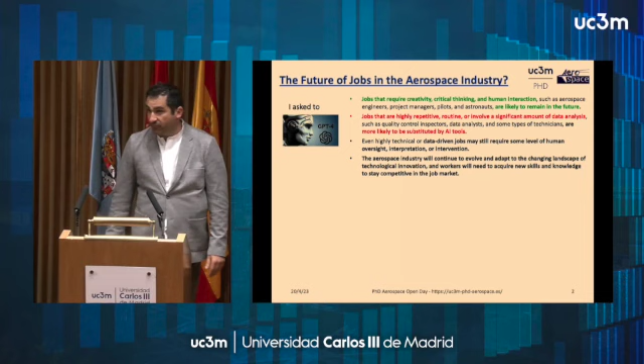I would say not all of them, but it seems like we're in the good direction. Of course, those jobs that are highly repetitive, routine, and involve significant amounts of data might be substituted by artificial intelligence or tools. The aerospace industry will continue to evolve and adapt to the changing landscape as we've done throughout the last century, but of course we need to change the way we are facing aerospace engineering.

I was not very convinced about the first answer, because we are aerospace engineers and we know that some of the jobs we are doing probably will be substituted by machines. So I kept asking: do you really think all aerospace engineers will remain in the future, just with a bachelor and a master? Or do you think we need additional background, additional training?

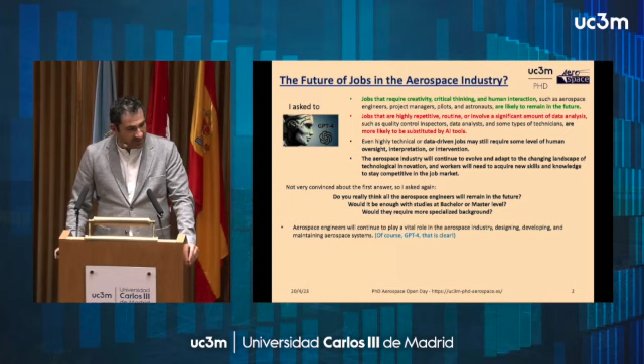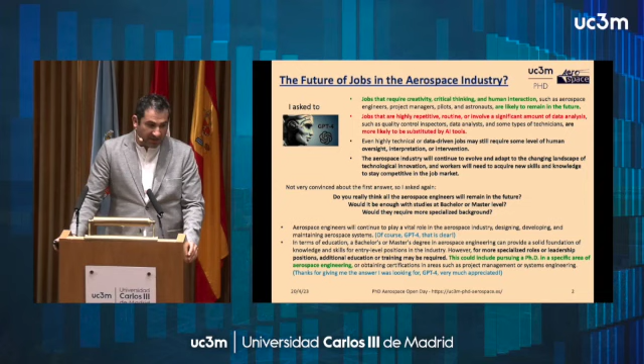And the chat provided me this answer: we will continue to play an important role. That's good news, that is clear. And in terms of education, it seems that pursuing a PhD might be a good direction to get creativity, critical thinking, and eventually have jobs in the future.

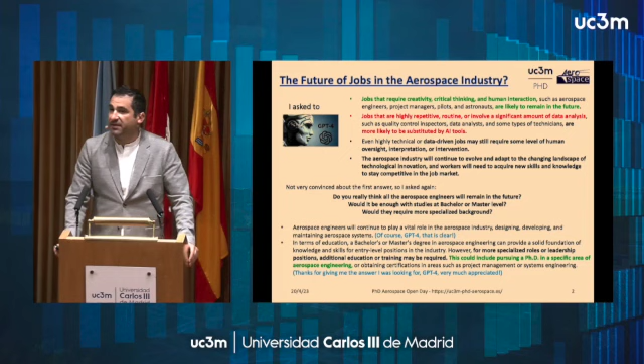So this is the answer I was looking for. It seems that pursuing a PhD might be a good option to complement bachelor and master studies in aerospace engineering and other fields.

Now, why pursue a PhD in aerospace engineering? I continued asking the chat, and it seems that it provides skills in problem solving, critical thinking, data analysis, advanced knowledge and skills, which is good.

It also seems that it provides innovation, or the capability to innovate, which is important, creativity. It offers the possibility to grow personally. So those three are intellectual assets, which we are all looking for.

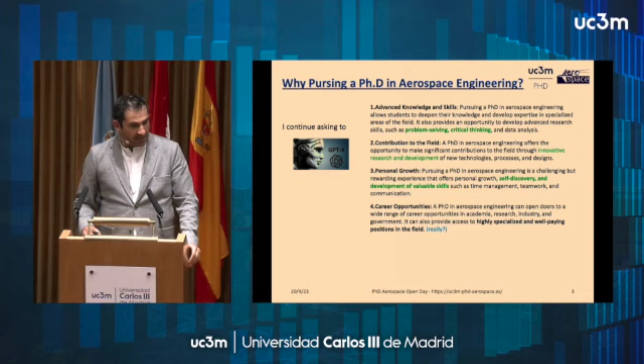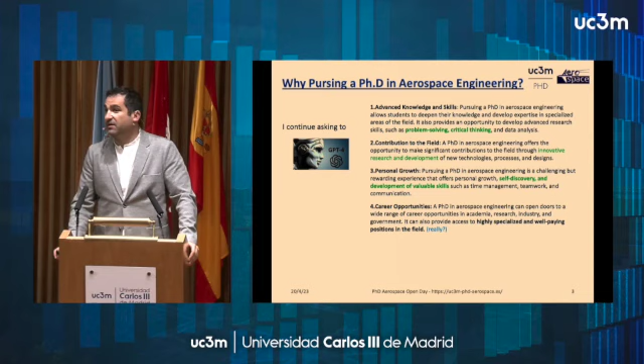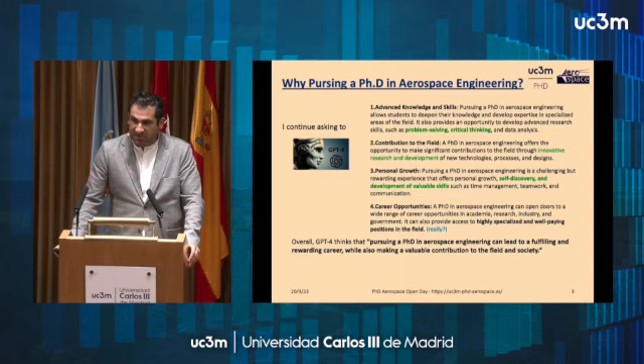All in all, the chat, not me, thinks that pursuing a PhD in aerospace engineering can lead to a fulfilling and rewarding career. We'll see that today, while making a valuable contribution beyond the state of the art, creating, innovating, and being intellectually satisfied.

All in all, by pursuing a PhD, and this is my opinion, you could be differential, and you need to be differential from a technical perspective. You need to be more and more creative, but do not forget the humanities. Keep asking questions to yourself. Keep putting the human in the center.

By putting the human in the center, by being exposed to many dimensions, writing, speaking, different scientific cultures, we will then be creative, like surfing the state of the art, the frontiers of knowledge, and by that we will be in the end differential to tackle any problem in the future. So this is the direction I think we should go.

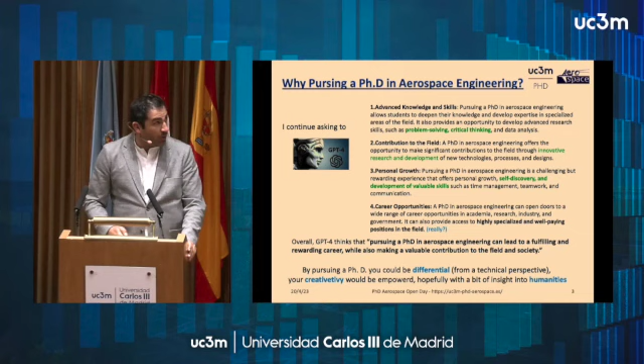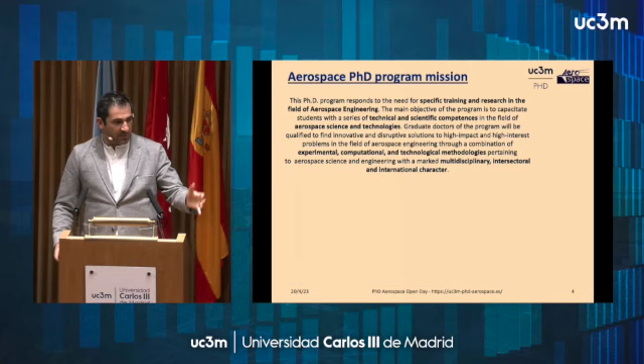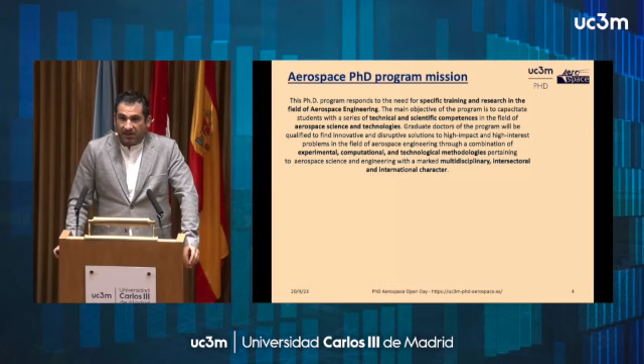Now, what is in our program, the mission? Well, we provide specific training on aerospace science and technology, from the theoretical fundamentals to numerical principles, moving to experimental work, and we have very nice experimental facilities in the department, to make a multidisciplinary, international, intersectoral career, in a way that our PhD students can in the end find opportunities where to follow a scientific career, both at research centers and also universities. And we have some examples, some people working at MIT, Princeton, Onera, INTA.

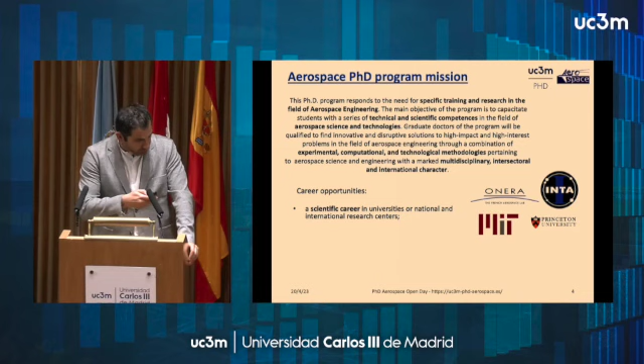Of course, this is not working quite well either, I would say. To follow an R&D career, research and development engineer, is a good option, and we have many people working at Airbus, Deimos as an example, and you will see them today. And finally, and this is also important, to create your own startup. For that, of course, you need to have knowledge, you need to be innovative, you need to be creative. A PhD offers you the possibility to follow this path, and we will see 2 examples today.

So, the agenda. This was the welcome, so welcome to all. I will start by describing the program myself, hopefully quick. And I already did the welcome. It was not the chat, it was me, I would say, but the chat helped me.

Then the members of the department, those leading the different research lines, will provide you a helicopter view of what we are doing and some of the opportunities for doing a PhD that are open now or might be open in the near future.

And I don't think the chat could ever do this, maybe in the future, but of course humans are in the center here. After that, we will have 5 very short presentations telling 5 stories about how they ended up in their current positions, and eventually also now offering postdoctoral or PhD opportunities for you.

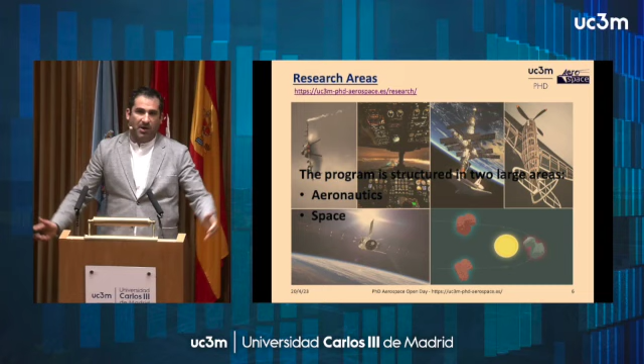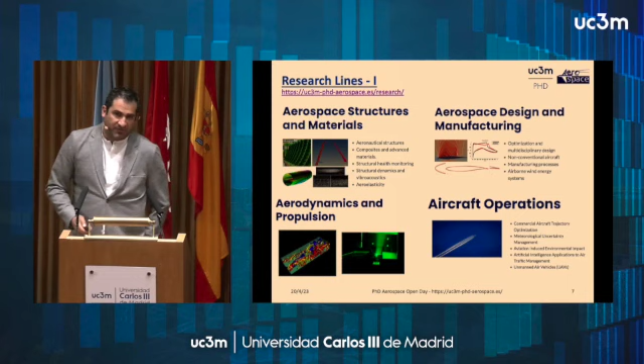Now, about the program. It is divided into 2 main areas, space and aeronautics. We have 8 research lines, 4 on aeronautics, including structures, materials, aerodynamics, experimental and computational aerodynamics, propulsion systems, then all the design and manufacturing of the vehicle, and finally the operation of the aircraft. So we are touching the classical fields of aeronautical engineering. There might be, of course, others.

When it comes to space, we have propulsion, we have all the different systems, we have astrodynamics, including space debris, which is a hot topic, also space tethers. And we have also control, which is a mix between space and aeronautics, which is also a quite interesting topic today, linked to CubeSats, UAVs, and automatic vehicles.

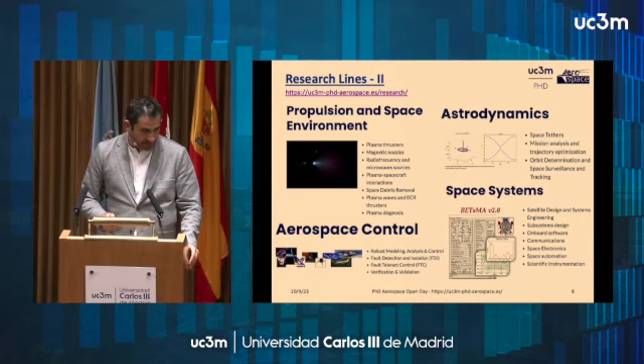So, female engineers or mathematicians that want to pursue a PhD are quite welcome, and we are really looking forward to having more women in our program.

And also when it comes to sector, we have many academic PhDs, but more and more the industry is willing to have employees pursuing also a PhD, and I think we are moving in a good direction, in terms of industrial cooperation with institutions such as ESA, INTA, and other research centers.

This year we had our first 3 students graduate from the program at the end of the year, and one of the ambitions is to build a network. Networks are quite important towards the future, so having these 3 students, or our 5 panelists who are not graduated from our program but from other programs yet supervised by ourselves, is important, because they're going to provide you a first contact with some jobs, some opportunities, experiences, and I think this is always going to be important.

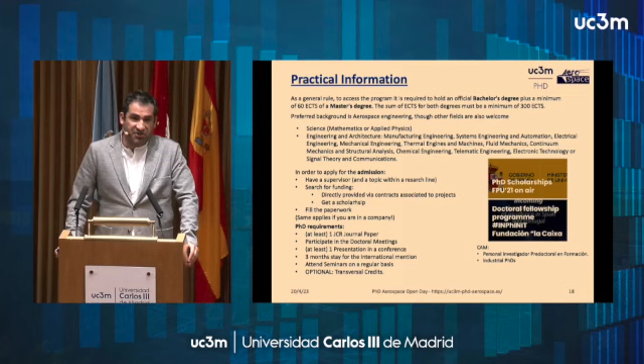And the requirements in the end, as I was saying: one paper, participate in doctoral meetings, present at least once in a conference. If you want to have the international mention, which is not a must but we highly recommend it, you have to go abroad for 3 months and attend seminars as much as possible.

All the courses are optional. We have also soft skills, but again, the more you are exposed to the different training activities, the better in the future for you. You will retire probably at 70 or 75 years old, so get trained and dedicate your time to really grow.

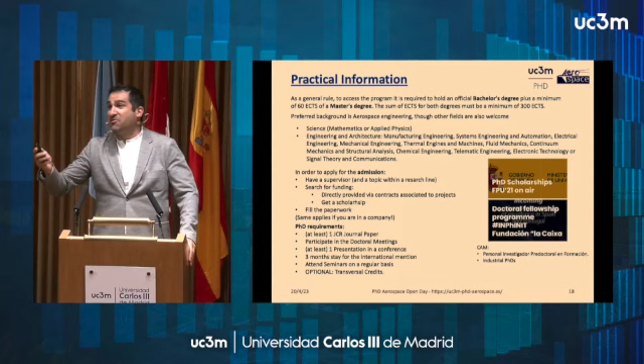No, because many people are like, in 23 years I want to work. Yes, okay, go and work. But be aware of how the future would look like.

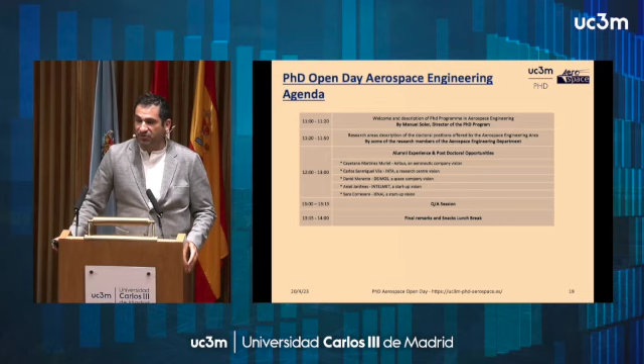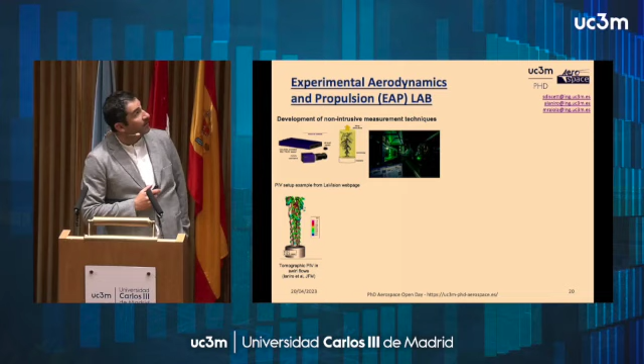Sure. So I'm Marco Raiola, I'm a representative for the Experimental Aerodynamic and Propulsion Lab. In this group, we are driving several research lines.

The first one is the development of non-intrusive measurement techniques, essentially optical techniques. For example, the use of infrared thermography for both thermal measurements and heat flux measurements. And what you see here are particle image velocimetry measurements, which use both lasers and cameras to visualize tracer particles in a flow in order to track their displacement.

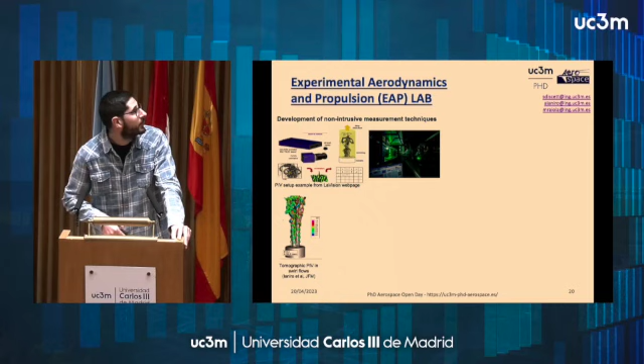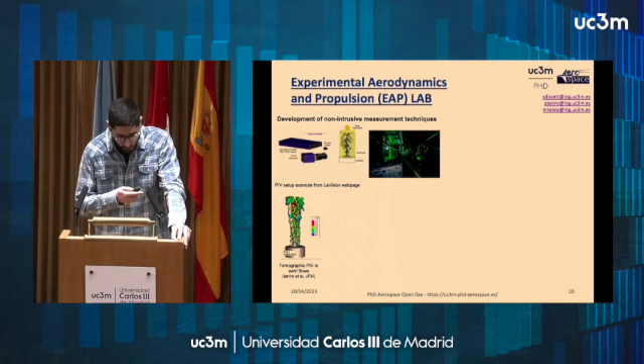For example, one can reconstruct the flow, such as you see in this video of a swirling jet, in which we are showing the three-dimensional flow field. This research line is currently being funded through the Next Flow project, which is an ERC starting grant project led by Stefano Discetti.

Another line that we are following is the use of machine learning for flow control. This comprises two sublines: flow sensing, essentially the use of few sensors to estimate what happens in the flow. Here you have an example, to estimate what happens in the flow starting from measurements from a wall, for example on top of a wing, and to know what happens in the flow. This is especially useful for active flow control, using this information to control the flow.

This is essentially inspired by nature, in which one can try to control the flow by trial and error. The idea here is to use, for example, some machine learning technique, such as reinforcement learning, to control the flow. Here you have a video of the control of the Kármán wake in the wake of a cylinder.

The last line I want to present is aeroacoustics in turbulent jets, which is a very important problem nowadays. The idea is to study and try to control the noise emission out of a turbulent jet. Here you see a simulation of the jet and the noise, the pressure wave being propagated.

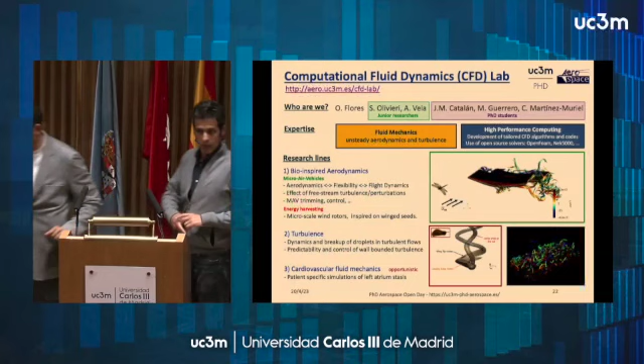Okay, so hello everybody. My name is Oscar Flores, and I am the director of the Computational Fluid Dynamics Lab.

Our activities focus on understanding fundamental problems that appear in unsteady turbulent flows, typically related with the transport of either scalars or momentum, that at the end of the day is what results in the aerodynamic forces appearing in this type of problems. This is myself.

Our group has two junior researchers, Stefano Olivieri and Alberto Vela, and at present we have 3 PhD students plus 1 industrial PhD student not in this list. Our expertise is in fluid mechanics, unsteady aerodynamics and turbulence, and all the work we do is computational, so we are also experts in high performance computing, both developing our own solvers and using available tools in the industry.

We work mostly on 3 research lines. The first one is bio-inspired aerodynamics, which has 2 different branches. One has to do with the aerodynamics of micro air vehicles, very small devices of the order of a few centimeters that, in order to generate the forces they need to fly, essentially use flapping wings.

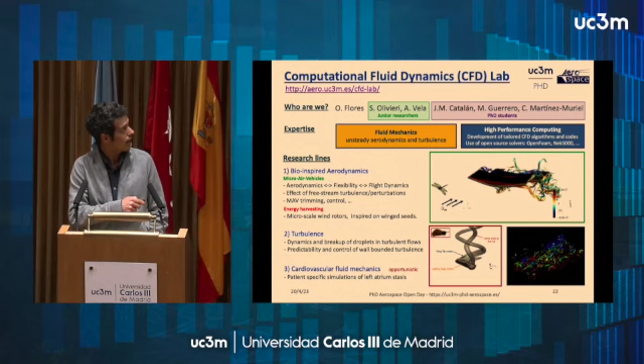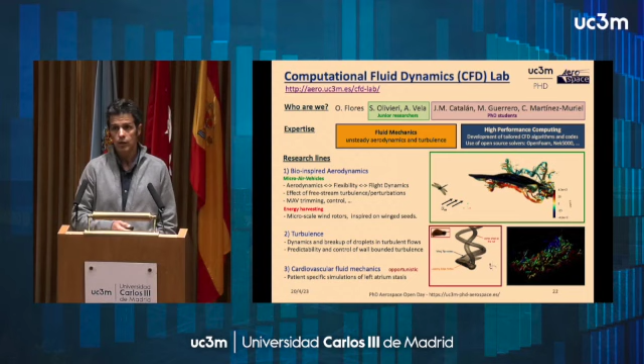Finally, we have a line that has to do with cardiovascular fluid mechanics. This is essentially an opportunistic project that popped up because of the software we developed to work on these bio-inspired aerodynamic problems.

Now, what about the future? During the next year we foresee that we will most likely be opening two different PhD positions, one to work on unsteady aerodynamics and another to work in turbulence. So if any of you is interested, please email me or talk to me after the presentation.

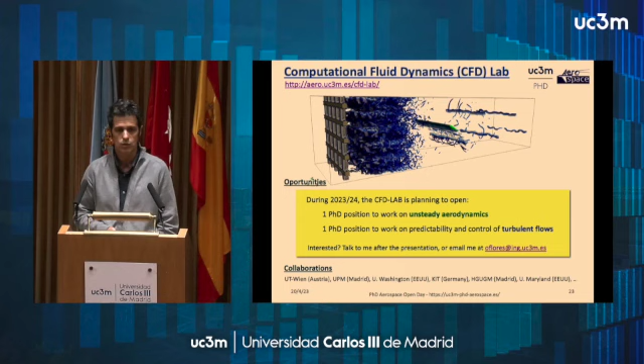To finish, we have a wide network of collaborators, both in Europe and in the US. We think this interaction is very important, and we encourage all our PhD students to have stays in different institutions. Thank you for your attention.

Good morning everybody, my name is Andrea Cini, and I'm presenting the lab I co-direct together with my colleague Rauno Cavallaro and my colleague Antonio Ramondo over there. Strange as it sounds, I got a PhD—so that's something all of us have, we got a PhD.

Basically our lab is called ASD Lab, Aeroelastic and Structural Design Lab. We are focused on problems related to applied research in aeronautics in general, related to two different aspects: flight physics and the structural point of view—the airframe and its interaction.

Manuel before was talking about multidisciplinarity, and this is quite important—aircraft design is a very, very multidisciplinary aspect, so we need to consider this too. As you can see, we do research on different topics related to flight physics, aerostructures, aircraft design, MDO, manufacturing, and multi-physics simulation as well, which are very multidisciplinary, together with, thanks to Antonio, our new member.

We can summarize everything according to what we call a vision. Our vision is to perform research on different aspects of the development of a flying structure or flying vehicle—basically aircraft design, manufacturing, certification, performance assessment, integration of new powertrains, and the assessment of the impact on the environment, which is another important aspect we'll talk about in a second.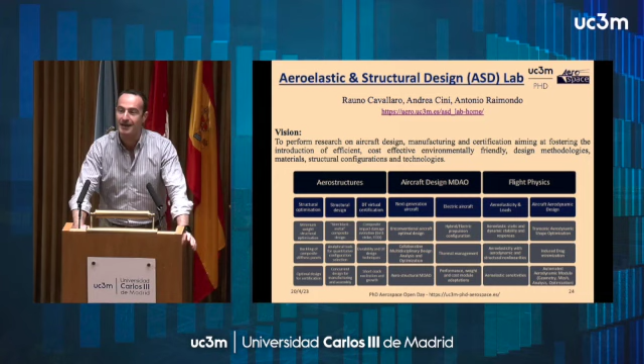So this could be a good PhD if later on you don't want to do an academic career, but you want to work in an R&D department of a company. Research is done at the university level, but also at the industry level, and synergy between the two environments is crucial nowadays, especially when you work on cutting edge technology where you don't have traditional literature to look at.

So that means we work a lot with companies, a lot of European projects, a lot of industrial projects, and generally this is quite nice, especially if you are indecisive about what to do, or you'd like to do research on applied things, or see something that is going to fly for real. That also means benefits in terms of placement and salary.

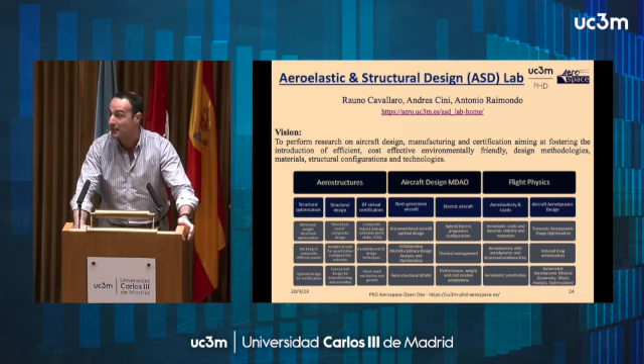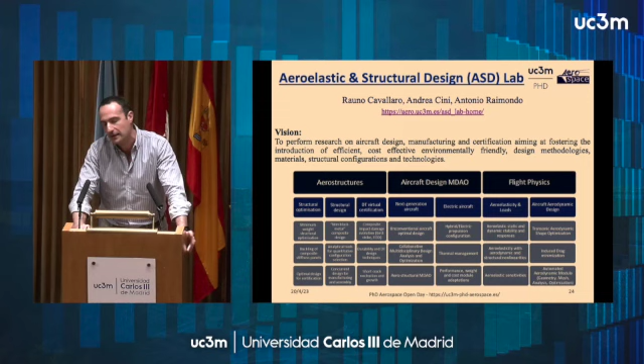But don't get me wrong, we are not denying physics, mathematics, or all the fundamental research, because in order to apply things in an efficient way, reducing time to market and the trial and error procedure to maximize impact and reduce development time, you really need to know the physics of the problem and have a good portfolio of different methodologies, mathematical optimization algorithms, and coding as well.

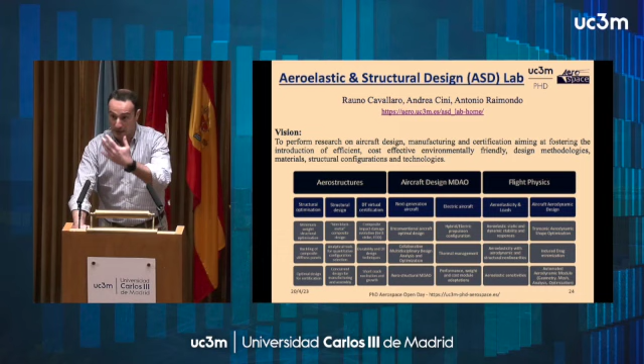So as I said, we have several projects. We've been quite successful in the last year, opening different European and national projects, and what we call service rendering, collaboration projects funded by industry directly. So we are opening basically 4 positions in the future on different aspects.

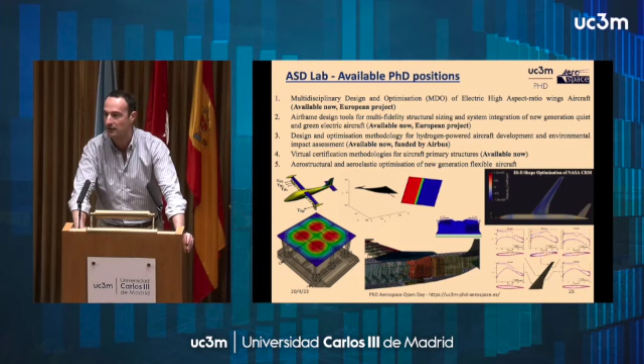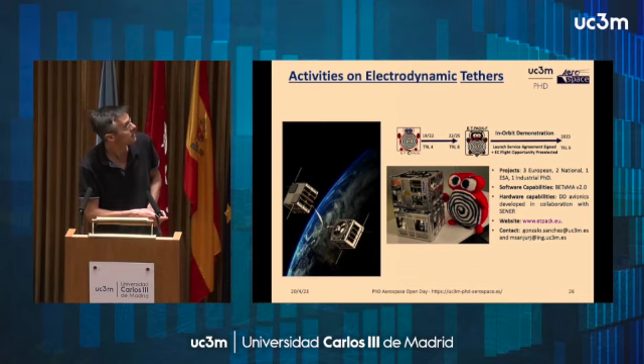We are developing electrodynamic tethers. In this framework we have different projects. The two most important ones are E.T.PACK, which ran from 2019 to 2022, where we developed the deorbit device you can see here, this prototype with TRL equal to 4. Then we got another project, also funded by the European Innovation Council, now running. It started in September to increase the TRL up to 8, to prepare the deorbit device ready to fly.

Such a device is going to be flown in 2025. A launch service agreement was signed between two partners of the E.T.PACK initiative, and we were also preselected by the European Commission for a flight opportunity.

In the last few years we have been funded by ESA, by the European Commission, and by the Spanish government. If you are interested in this technology, please don't hesitate to contact Manuel Sanjurjo or me, and we will see if we can offer you the possibility of doing a PhD in this area.

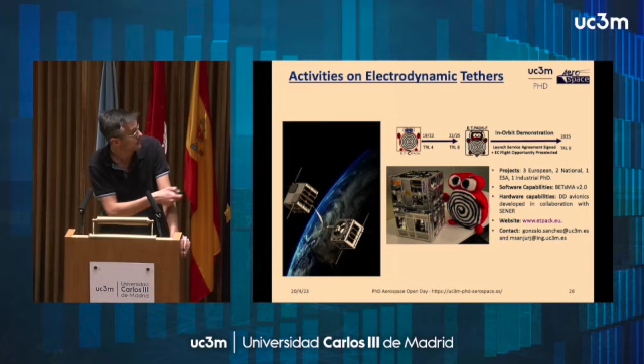We are experts in software development, in tethers, in introducing new concepts like the low work function tether and the bare photovoltaic tether. We also have experience in avionics. We developed, in collaboration with SENER, the avionics of the deorbit device, actually in the framework of an industrial PhD program - all the avionics components.

The second line of research related with tethers is not in space, it is in aeronautics, and it is called airborne wind energy, AWE. These are machines able to produce electricity by using wind energy, but they operate using giant kites or giant drones linked to the ground by a tether. So we are able to remove the tower and reduce the cost, and also operate at higher altitude.

Nowadays there are machines able to produce about 150 kilowatts in a pre-commercial state in Europe. Unfortunately we started this research 10 years later in Spain, but we are now progressing quite fast, especially because we are now collaborating with industry, with a company called City Ingenieros.

In the last few years we have developed software in collaboration with Professor Rauno Cavallaro, who is also director of a PhD thesis in this area. We have developed software for dynamics and control, and we have developed a test bed for the aerodynamic characterization of this type of system.

Recently we got a space in the scientific park, and we founded the first laboratory dedicated to this area, as far as I know, in Spain. We signed a contract with City Ingenieros to promote this technology and to prepare a first prototype in Spain.

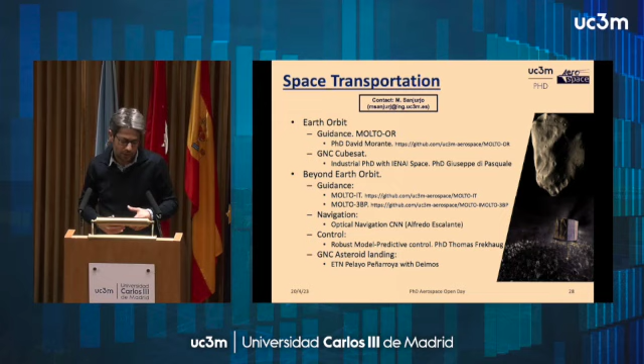In Earth orbit, David, who is present today, developed a PhD thesis devoted to obtaining the guidance for many different missions, both interplanetary missions and also Earth orbit missions, that allow us to obtain the optimal control law providing the better way of going from one orbit to another, or from one planet to another.

On the other side, we have an industrial PhD also in Earth orbit in IENAI, that maybe Sarah can comment on later, developed by Giuseppe Di Pasquale, in which they explore the use of micropropulsion for a CubeSat or small sat in order to provide this full solution of GNC in Earth orbit.

I'm finishing already.

From the point of view of Beyond Earth, nowadays there's the PhD thesis of Thomas Frekhaug dealing with robust control for both rendezvous and landing on asteroids, and also the PhD of Alfredo Escalante on using CNNs, convolutional neural networks, for producing optical navigation in both asteroids and relative navigation between satellites.

From the point of view of space safety, space debris is another topic expected to grow a lot in the next years because it is becoming a problem. One relevant piece of data is that in the last 7 years, the number of launches is the same as in the previous period, from the 60s to 2015. So the number of launches, or satellites in space, is increasing a lot, and this is producing a problem.

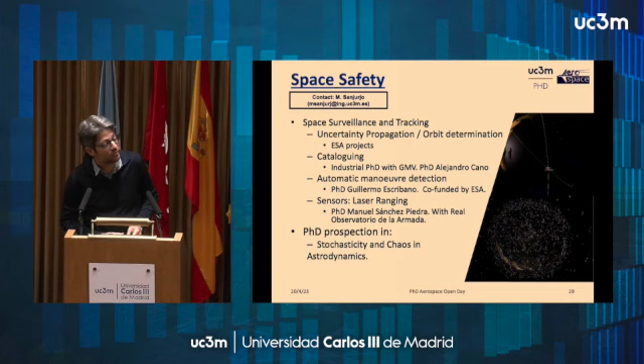Here we have a bunch of PhD theses ongoing, many of them close to operations. Many are industrial PhDs, like the one of Alejandro Cano in collaboration with GMV, the one of Guillermo Escribano, or in collaboration with the Real Observatorio de la Armada, the one of Manuel Sánchez Piedra. In this line, I would like to open at some point a PhD in something more fundamental, on how stochasticity and chaos can enhance our vision of astrodynamics for the future.

Well, thank you for the attention. Hopefully I used my 3 minutes. I think you went back to... Oh, this is actually myself.

So now, leading the area of research in aircraft operations: once the aircraft has been designed and manufactured and has to operate, that's where we step in. We have 2 research lines.

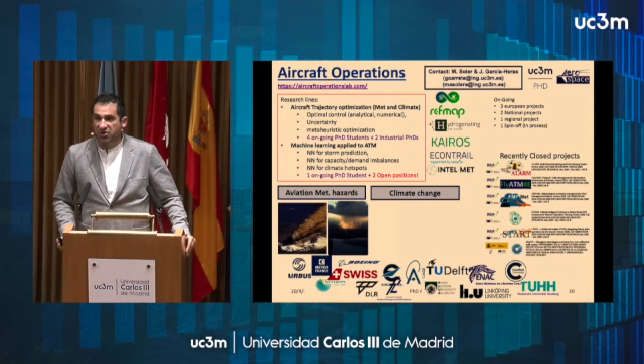One is on aircraft trajectory optimization, where we want to optimize the trajectory in a way that minimizes the climatic impact of aviation, dealing with condensation trails, aviation-induced cloudiness, CO2, and other species. The other is applying machine learning techniques to predict bad weather phenomena such as thunderstorms, wind shear, turbulence, and ash.

We've been working on a bunch of projects, and we have a lot of running projects in collaboration with many entities all over Europe, ranging from research centers to companies, so we have a wide spectrum of activities.

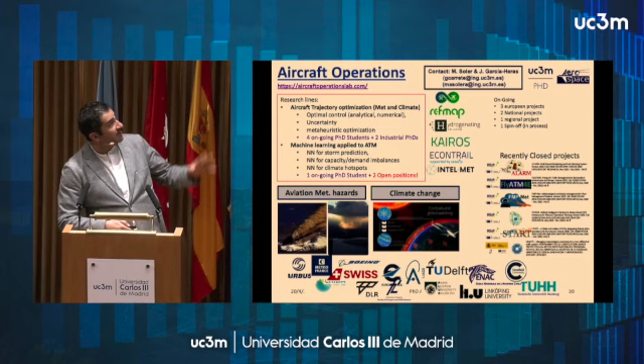As for open positions, we currently have 2 open positions in the area of machine learning or artificial intelligence applied to aviation. One is related to prediction of weather phenomena, where we're trying to blend observations together with numerical weather forecasts, a trend going on in meteorology worldwide, to enhance forecast quality and tailor phenomena that might be harmful for aviation.

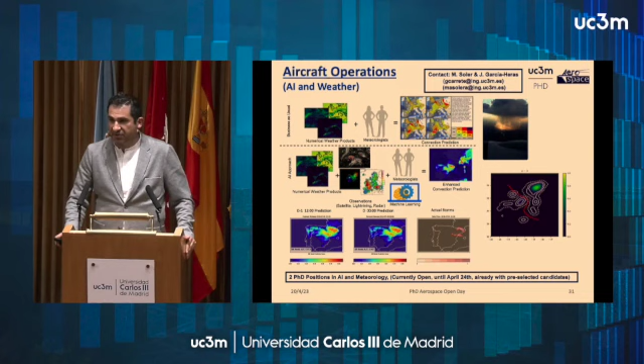We have 2 positions open; we already have some candidates preselected, but if you're interested in this type of activity, please don't hesitate to contact us. The other open position has a submission deadline expiring on Monday, so if you're interested, please talk to me today.

This position has to do with artificial intelligence to predict climatic hotspots derived from aviation. We'll use remote sensing techniques, information from satellites, to observe contrails, linear contrails, aviation-induced cloudiness, and measure the radiative forcing, the energy balance of those artificial clouds. Combining these observations with numerical weather forecasts based on historical analysis, we try to build a neural network architecture to predict climatic hotspots, so aviation stakeholders can plan trajectories or sectorize their airspace in a way that reduces the non-CO2 aviation climatic impact. This is a hot topic today in Europe.

That's all, I think I was quick. Now, Andres, I think is...

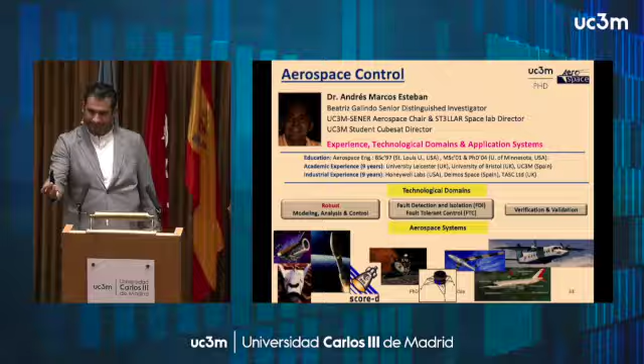My name is Andres Marcos. I arrived at the Aerospace department at Carlos III only 2 years ago, but in any case, I always think it's useful to know what we do, but also who we are. So I'm what is called a Beatriz Galindo Senior Investigator. The senior you can see by the hair on my head.

What I specialize in is the transfer of advanced techniques in robust control to industry. I've been doing this for the past 25 years, half of my career in industry and half in academia, covering the States, the UK, and Spain. I like everything that flies, so I've been applying this to almost all aerospace systems except for helicopters.

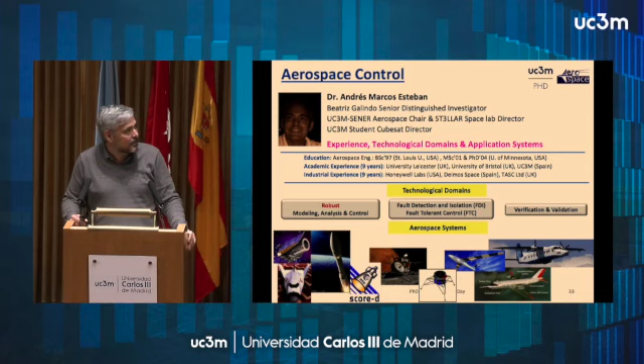Control is very transversal. When I mean control, I don't only mean the actual controlling systems, but also modeling and analysis, and the application of this to fault-tolerant control, fault detection, and verification and validation. I've been extremely lucky to flight test this in pilot aircraft twice, which is not very common in academia because it's a very expensive and highly critical system.

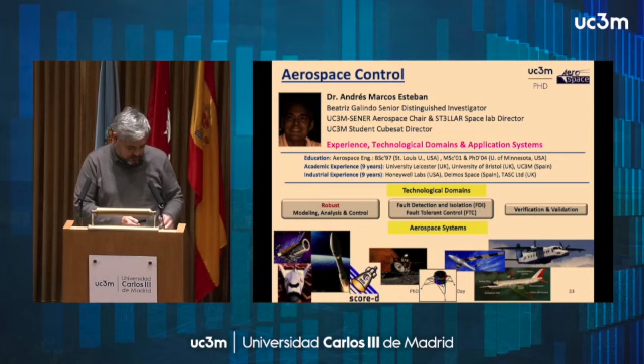In terms of PhD supervision, like most of my colleagues, my idea is always to try to help my students achieve their full potential and help them go into the next step. As Manuel said, a PhD that goes to industry is a person that brings quite advanced knowledge and enables the impulse of activities over there.

So these are the 4 students that I had and that I have. Diego Navarro, Andrea Iannelli, and Pedro Simplicio were already with me when I was at Bristol, and they graduated. Alice Ponche started with me at Bristol and will finish here at Carlos III in July.

This is the work, shown in the boxes on the right. This is an indication of how good they are, but also of how much I've been able to help them, and I'm quite proud of the publications we had while doing the PhD. Some of them are stellar - Andrea and Pedro published 5 journals and 7 journals respectively. We were able to travel quite a lot, and all of them got awards or nominations.

Alice, the current student, got a Best PhD Poster Award in the United Kingdom, and last year was finalist for Best Paper at the EUCASS conference, the 2nd largest aerospace conference. But more than that, with Diego, we were told last month that the Vega launcher is actually flying - we were working with them, and what we proposed for the control is flying on one of the Vega launchers. An adaptation of that is now the established control process and architecture used on the Vega C.

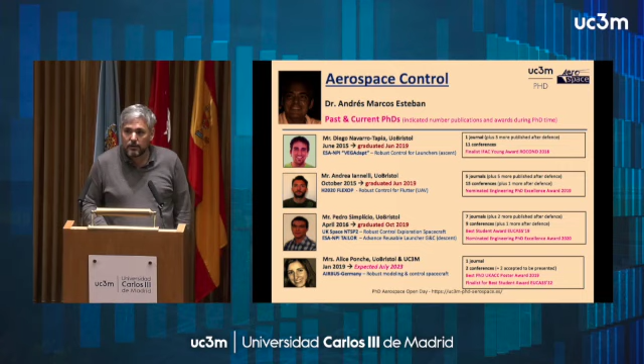And with Alice, the same: the guidance she proposed and got awarded for at EUCASS - the feedback from Airbus is that it's quite advanced but very analytical, so it doesn't require very advanced processing. So there are chances this will be developed in the future and implemented in their missions.

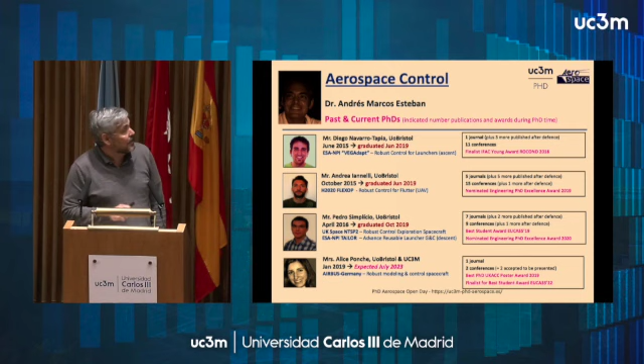That's what I think all my colleagues also try to do, help our students achieve. And like Manuel said, it's not only theoretical and academic. Andrea is now assistant professor in Stuttgart, but it's also going to industry - Pedro is at ESA, and Diego is a senior control expert at a small medium enterprise.

In terms of opportunities, like many of my colleagues, we are looking at machine learning and artificial intelligence. I try to reconcile this with robust control techniques and apply them to aerospace systems. We already applied one of the artificial intelligence techniques to a launcher, but only to a model, and it's working pretty well. So I want to expand this, mostly focusing on small satellites.

We're also developing a center for satellites here at Carlos III. In that aspect, I'm looking at developing AOCS verification and validation for small satellites, which isn't just building the demonstrator - there has to be a lot of theoretical development to understand how to validate these things for control of small satellites. So these are some of the opportunities that I have.

I have initiated and lead the student CubeSat at Carlos III since September. I'm asking all my students, and also nudging my colleagues to ask their PhD students to help with this, because there are many topics. It's an actual CubeSat that has been selected by ESA for the Fly Your Satellite program. Alice, for example, is the system engineer of the CubeSat, and I'm asking all the students to donate 10% of their time to help with these activities, which is also part of the research activities that they do.

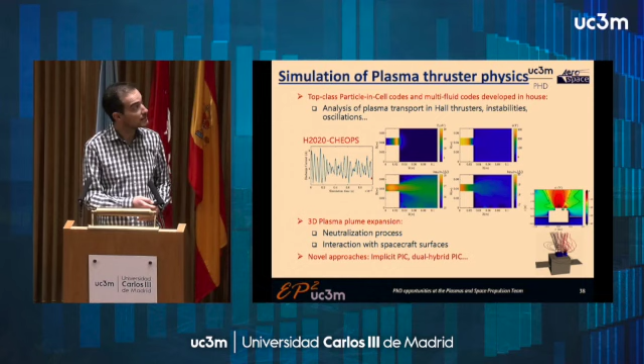On the other hand, we also have simulations of more novel devices, for example the electrodeless plasma thrusters. This involves the plasma flowing in magnetic fields and new designs that we are creating in our laboratory and testing them in our vacuum chamber and so on.

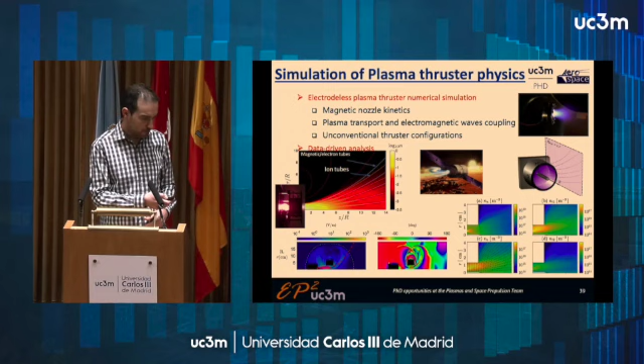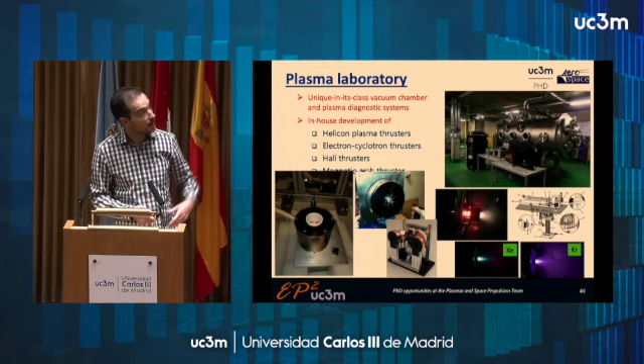As a PhD student, you have access to this unique equipment, and you will be using state-of-the-art techniques to measure the plasma directly, both with probes and with optical techniques and so on. Here you can see some of the developments we have done, such as Hall thrusters, other EPTs. Some of them over there are firing and so on.

Just one slide that I think applies more or less to all the other groups as well: what are we looking for if we want to hire you? We want very good academic records, both in your bachelor and your master. Especially we are looking for strong profiles in mathematics and physics, because I guess most of the PhDs have a strong requirement on this.

We also look for people that have a lot of initiative and creativity, that are responsible, and can work both autonomously and as part of a team. For the plasma propulsion group, when we are thinking of a PhD position on modeling, we are looking for someone who can program relatively well and has the skills to analyze numeric algorithms. For the experimental work, somebody who can work with the design, procurement, building, testing, and so on in an organized manner. I think there are always opportunities in this field.